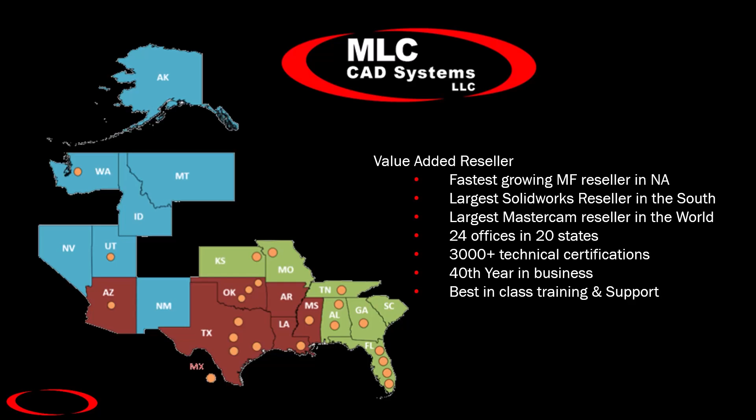I'm going to talk today about the basic 3D printing landscape, tell you quick information about Markforged, what it looks like when you pick up a Markforged printer. We'll talk about some examples and an overview of the solution, and then feel free to reach out for discussion or Q&A at any time, or reach us in the comments of this YouTube video.

So I want to tell a story real quick about an adoption of a new technology. Now, this is one that happened many years ago. This was the decline of steam engines and the increase in the use of electric motors in factories. And if you can see on the left here, this first graph talks about when electric motor usage or sales sort of overtook steam engines and became the dominant force in the manufacturing power industry. That's around the year 1920.

And as you can see, there was no going back, right? This was clearly the superior way to do it, and things looked great from that day forward. However, if you look at the graph on the right, productivity in manufacturing, you can see that productivity was kind of slowly going along, probably just a remnant of all general labor productivity increases, but the ROI dropped.

Because the early adopters had to pay for the tooling for all the motors, the buildup of the machine, the R&D to get the motors fabricated and make them more efficient and more powerful, because all of that was happening, the ROI really ended up being not that great. There was so much additional infrastructure investment required to get the electricity, to buy equipment that would run on electric motors instead of steam. And so for about 2 decades, it was kind of a losing battle, but it was definitely worth it in the long run.

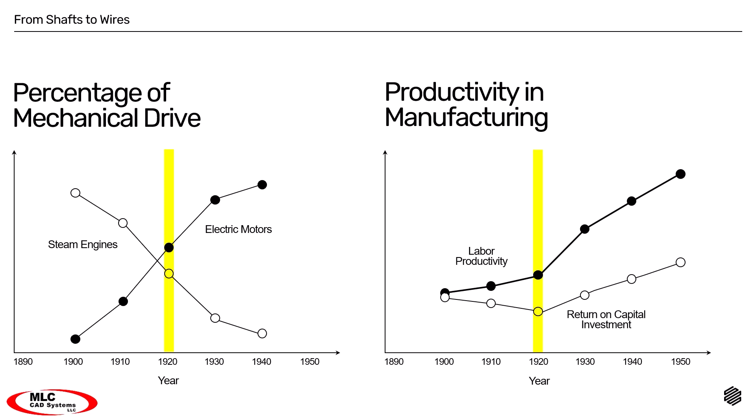But after that inflection point, the ROI started to become fantastic. And very soon it surpassed the productivity or the ROI that we've ever seen before. So it was definitely the right move, but there are some growing pains related to the time frame. So to overcome the constraints of steam power, factory owners had to shift their thinking. And that's what we're talking about today, is shifting your thinking to see how additive manufacturing and 3D printing can help you add value. Now, I'm not suggesting you're going to drop a technology entirely in order to adopt 3D printing, but it's going to be a fantastic add-on that's really going to help you out.

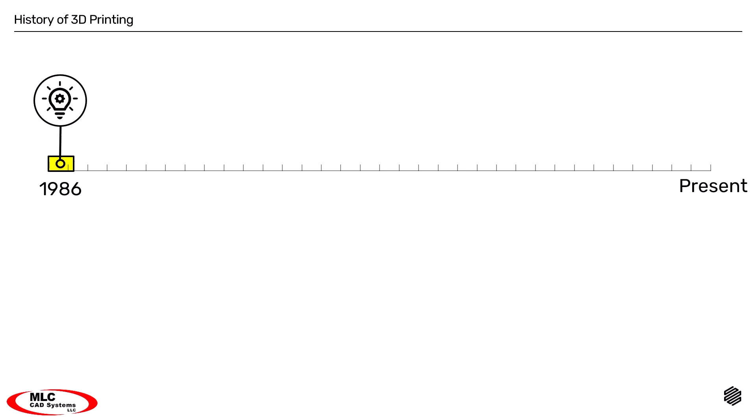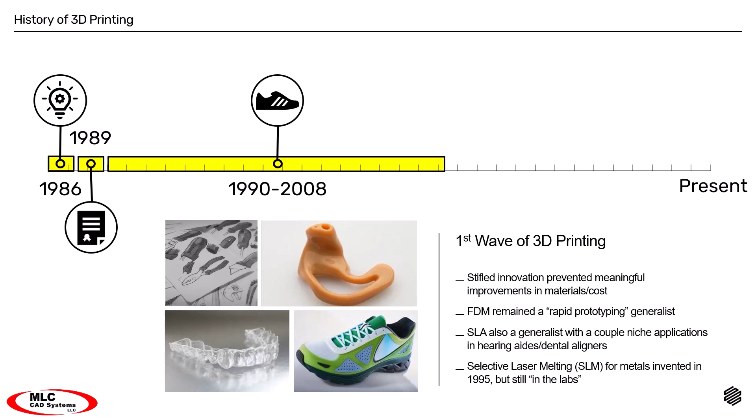So in comparison to the steam engine decline, let's talk about the adoption of 3D printing. It started back in the 80s. The original 3D printing was made. They started creating patents for all the various different technologies. And from the 90s to about 2008, you saw all kinds of really cool stuff. But it was really expensive, and most parts were not strong at all. It wasn't really until 2009 when the patents started to expire and companies said, hey, I can make something that does that. And there was an explosion in companies not only creating 3D printers, but people using them.

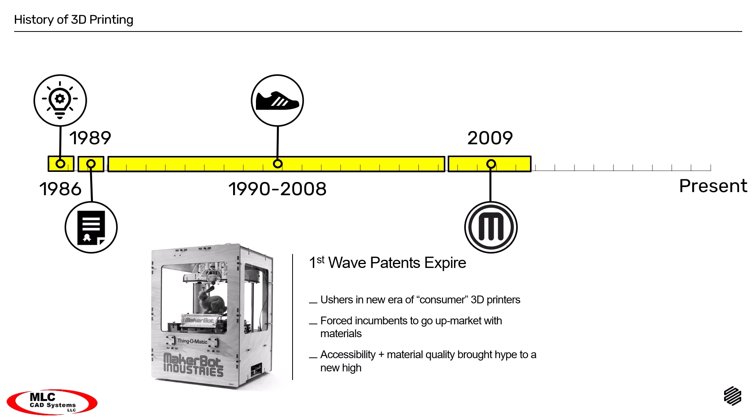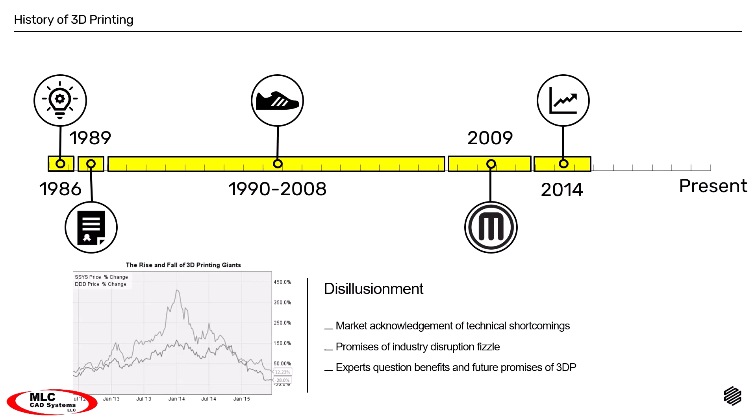And what we start to see is in about 2014, they were everywhere, but anyone who tried to use them generally felt them to be overpriced, not easy enough to work with, or the parts just weren't strong enough. And so there was kind of this disillusionment, and it was picked up on by Markforged. That's when they started out. They saw an opportunity in the market to create printers that could drive immediate value, that are extremely strong. In fact, their first customer was NASA.

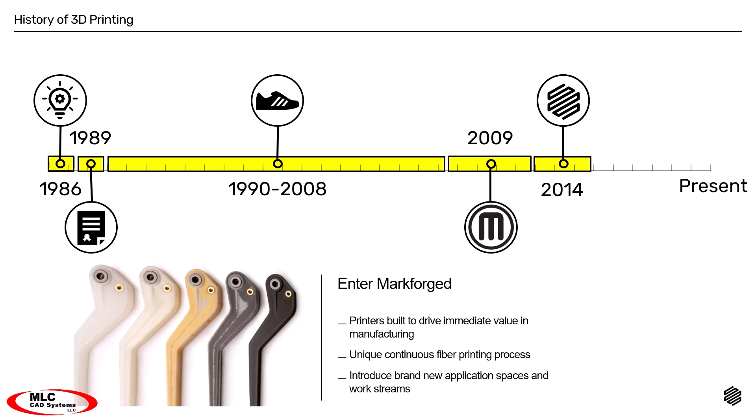They wanted to send the most stiff, strong, and lightweight parts imaginable into outer space, and they built the machine that would do exactly that. And what we've started to see since then is not just Markforged, but the entire industry has evolved and matured.

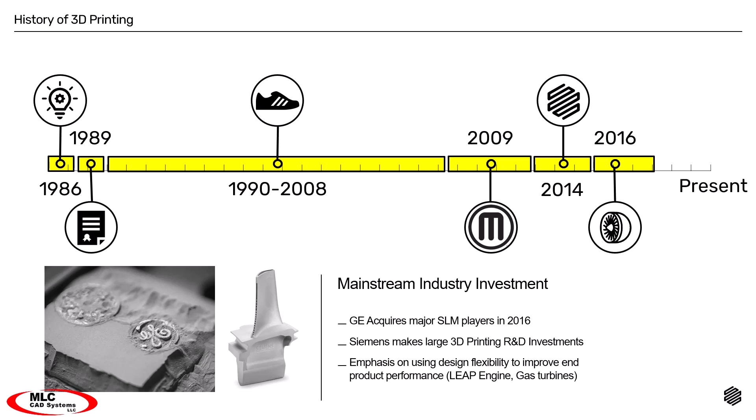And what you see now is we're seeing parts. In fact, today, the Boeing Dreamliner has 3D printed fuel injectors in the engines and the turbines. You're going to see more additive parts than you ever thought imaginable, and it's accelerating constantly.

So where we are today, we've got several different companies with a proven track record of creating really valuable parts and a really valuable system to add in to your existing manufacturing processes. And that's where we are today. So if you've looked at 3D printing anytime outside the last 5 years or so, it's time to look again and take a serious look at Markforged.

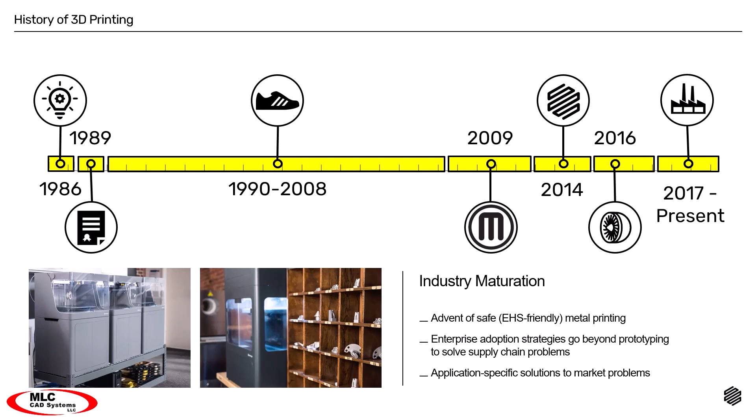It was established in Boston by some MIT graduates. They basically invented continuous carbon fiber 3D printing. A lot of people have tried to adopt or to copy some of the technologies, but we'll see a little bit later that there really isn't a corollary in the industry. These parts are really strong, really inexpensive printers relative to their counterparts in the industry, and they've created the world's largest fleet of online industrial printers.

It's on a cloud, so everything is connected. Your data is secure, right? Just like your Gmail account is secure, no one else with a Gmail account can see it. But because everybody's working on the same platform, they can watch usage, they can get feedback from users on what worked well and what didn't, and they're able to rapidly innovate with the benefit of seeing real-time information from all of the users. So the 3D printing ecosystem is smart, robust, simple, and empowering.

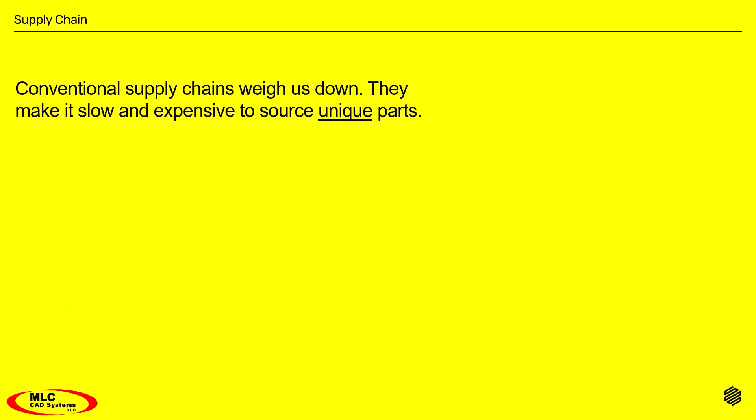So let's talk about why you would want something that could do all that. And it's supply chain. Supply chains are expensive. They're slow. They are many, many steps of paperwork, but they remain and will always probably remain the best way to create high volume parts for full production at a low cost and highly reliable.

But unique parts really struggle here. So whether you're talking about prototypes, tooling inside your shop, guards and guides and jigs and fixtures, or it could be even repair parts. Those kinds of things are really, really tough to source. And so if you don't have that manufacturing capability in-house, or you have to do a big changeover to do it for things like low volume production, it really isn't going to be the best ROI, or it's going to be difficult to make it profitable for you.

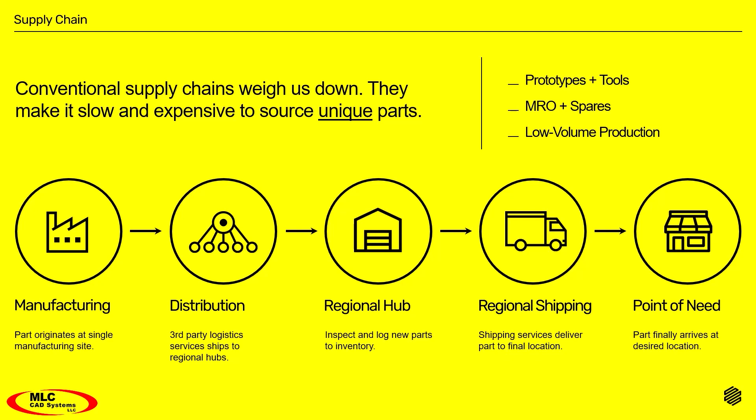And that's where Markforged comes in. We want to help you solve those unique part problems by bypassing the traditional supply chain, which, as we all know, is very problematic these days. And we want to give you an immediate payoff on your investment in a printer. But that's not all. We also want to build a culture of creative problem solving within your organization.

Let's look at some examples of what I'm talking about, who's using it, and what kind of success they've been able to have. So we'll start with the U.S. military. Wars have been won or lost primarily because of logistics. And with COVID and with just supply chain issues we're having right now, logistics is hard enough when you don't have people with guns trying to shoot you while you drive in and out of the work office that day.

So getting a part into theater could take months. We're putting these on expensive military planes and airlifting them if needed. The supply chain is slow or non-existent for maintenance and repair operations, especially in theater. So what Markforged printers give them the capability to do is to provide highly critical parts at the point of need. So you could have a designer on site, or a designer off site, basically creating the designs and validating them, and then that information gets fed into the machine and they print it right there and it's ready to roll.

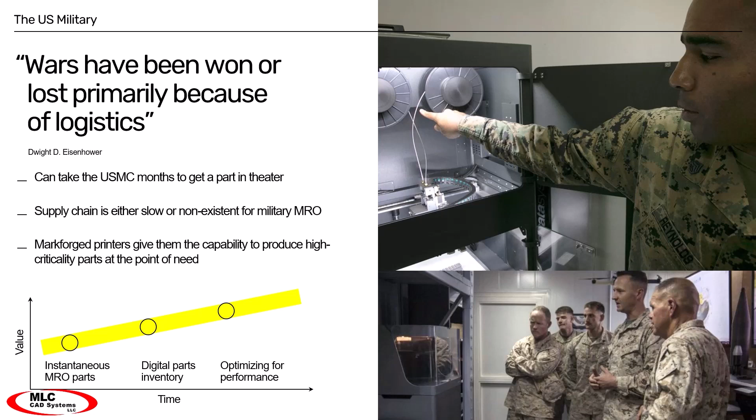And they have a whole library of existing verified parts that they no longer have to keep inventory of. As long as they have their printer, they can just say, oh, this broke, give me a few hours or give me a day or two, I will make another one. So really fantastic illustration of the extreme supply chain issues you might encounter.

MRO solutions, maintenance and repair operations, we're seeing a lot with this. And what you really benefit from is the ability to create something that's durable and strong, and you can iterate really, really quickly to get it up and running. And then once you get your prototype, it's a durable end-use tool.

So this innovation center in Orlando, for Siemens, they make huge steam turbine generators. They were responsible for supporting these turbines, but when maintenance was required, whether it was routine service or repair, there was downtime where they had to literally lift this turbine out of the building, disconnect it from the system, take it down there to get it fixed because it required specialized equipment they couldn't travel with, and then bring it back. And we're talking $250,000 for the lifting equipment and the trucking alone, not to mention the downtime for these critical pieces of equipment.

So what they did is they started building these tools. These are saws that go through and grind or reface some of the turbines, and they're built very specifically with lots of guides and gauges so that it can work on site in place, and they can basically take it down for a day, hours, I don't know, run the maintenance and get it right back up and running again.

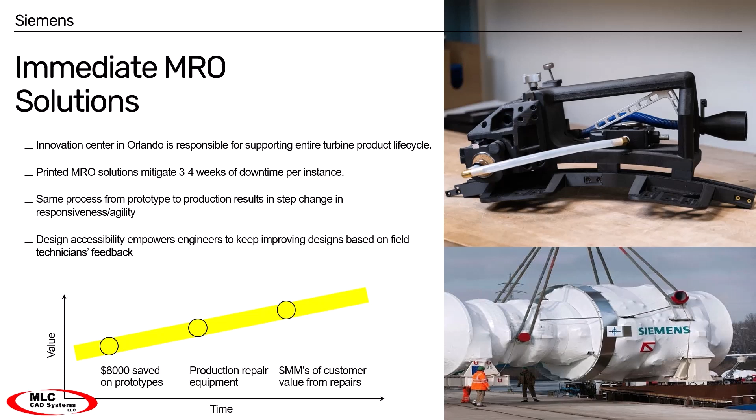So the ROI on these was absolutely stupid. They saved $8,000 for every prototype they did. They were able to perform and iterate tremendously faster. They could make as many of these as they need on demand, and absolutely saved a ton of money for them and their customers. Another company that, this isn't maintenance, but another company that's using it in-house is Wartsila.

So they have these huge steel castings, very heavy, and what they needed was a tool to be able to lift these engine parts. By the way, these are like drive shafts for massive ships, right? Cruise ships, etc. And so if you think about lifting up a massive casting, what you need to do is first put a hook on it. And to put a hook on it, you need some kind of device mechanism that sort of grabs the part and has a lift eye at the top.

Well, those are made of metal. And because of the size and the weight rating, they were very heavily built, which means they're so heavy that even the lift mechanism cannot be lifted without a crane, at least not safely. And so what they would have to do is go bring the crane over to where the lifting mechanism was stored on the shelf, pick it up and carry it to the casting, wait for the operator to hook it on, then they would carry it over to where they needed it to be for the next operation. They would drop it in place, they would disconnect, and then have to take back the fixture to the shelf.

So what they ended up finding was, A, this thing was cheaper than even the commercially off-the-shelf available steel versions. They also improved worker safety because at no point were they trying to handle or manipulate something that was dangerously heavy for somebody to lift. They also found that it saved time on their crane operators.

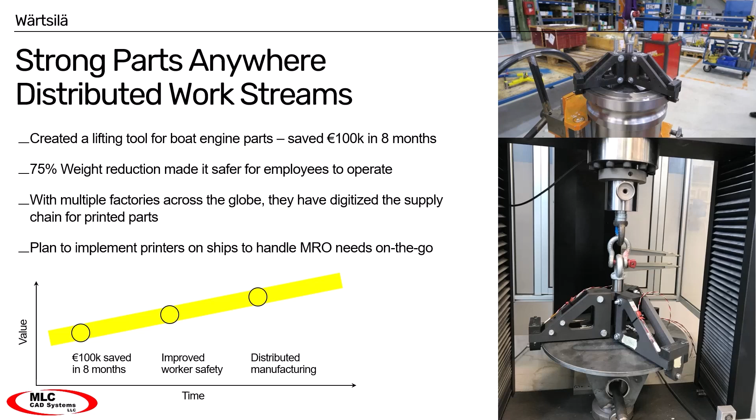And you're not sort of breaking the rules. You're not taking a chance. These are safe and effective parts. So the digital forge is what drives all this. And there's three main pillars. It's enterprise level software, industrial 3D printers, and industrial materials.

Now, you may think, oh, well, they're selling their own materials. They're just trying to make all their money there. These are not overpriced materials, but they are extraordinarily high quality materials. And because they are constantly innovating both in terms of how the printers print, the speed of the print, occasionally they reformulate some of their materials. And when they do, the software, the printers, and the material availability happens simultaneously. There's no downtime. There's no question of, do I have it right?

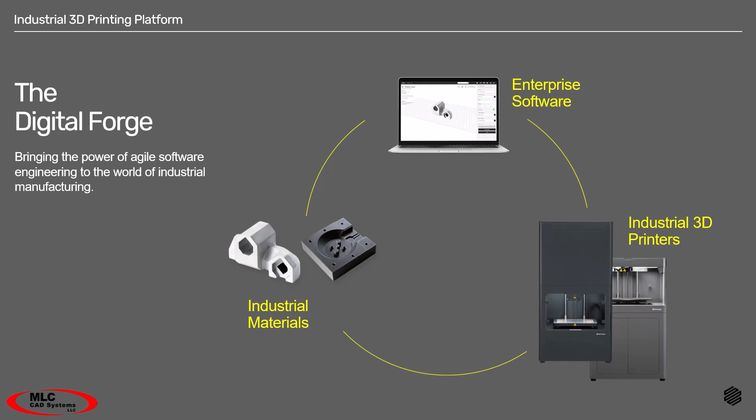You've got apples to apples, and you've got direct line of communication between all three of these, which means if anything goes wrong, you have a single source of accountability where we will be able to help you get back up and running and fix the problem. The hardware is kind of the star of the show for most people, but it's only one piece of the puzzle. We've got different grades, different levels of machines.

If you need more capacity, if you don't want to have to maintain a bunch of small ones, if you're looking for something with more automation, with more sensors, so you know it's going to run well and it can run even more lights out than the desktop, then you can go up to the X7 or the Industrial series. They have bigger beds. They have stronger drive motors, so they're going to be able to print much, much faster. And they do a lot of the same materials. So it's sort of like just the bigger version, right?

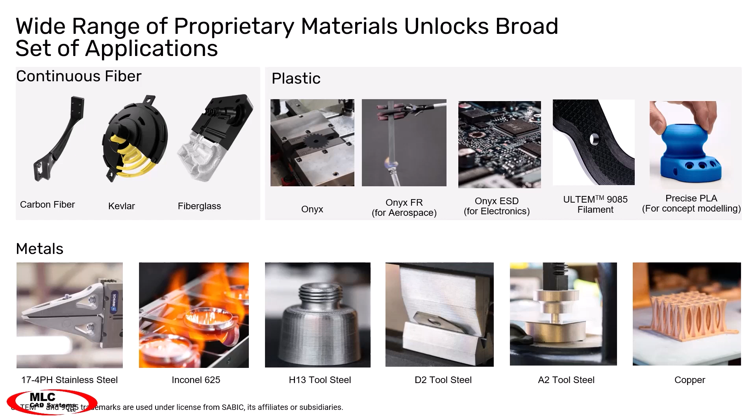Then we have 3 tool steels, H13, D2, and A2, depending on what you need, whether it needs to hold an edge or it needs surface abrasion resistance. There's some variations in what those do. And then pure copper, which is fantastic for thermal and electrical applications. So for example, EDM sink patterns or heat sinks, things like that.

So the PLA, the Onyx, the carbon fiber, what it allows you to do is start quick and cheap. PLA is quick and cheap, and you can print it and basically hold it up and say, does it fit? Do the bolts line up, right? Once you get the shape down and you immediately have something that's at least semi-functional, then you can start iterating and say, okay, well, if I did it like this, I could lose weight. If I do it like this, it's easier to assemble and it's quicker to print.

And then once you feel pretty confident that you've got that part done, you can step up to Onyx. And that's where you can start to actually put it into production. You can load test it and see if it's strong enough. If it's not, you can add some fiberglass, some carbon fiber. You can increase the density of the interior of the part. With one design, you have full control over the strength and stiffness of that part.

And you can actually go into initial production with this, meaning you can delay your tooling purchase until the market has had a chance to look at it and decide, yes, this is something they want, or maybe this isn't quite what we need to do a design change. Thank goodness we didn't buy tooling yet.

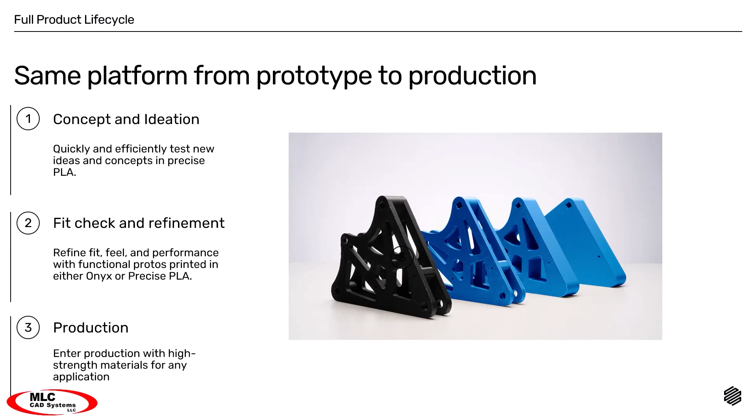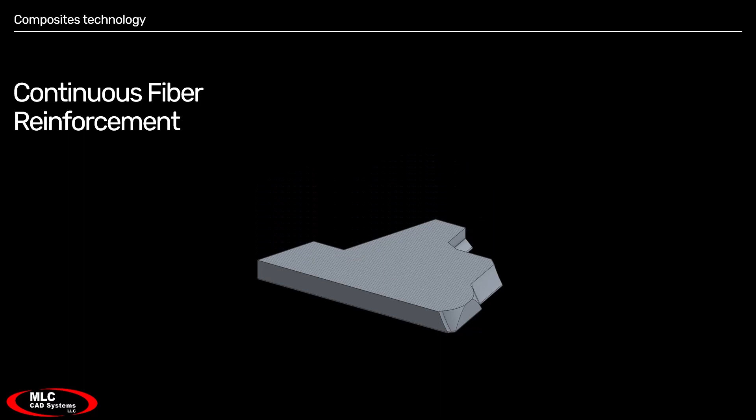So the process, if you're not familiar, of continuous fiber reinforcement, it starts with a 3D model. We can handle any CAD package you may have, and you start slicing it layer by layer. So for each sliced layer, we will go in and trace out the walls, trace out the floors, and those will all be solid, but then we'll put sparse fill on the interior, and then you get to choose where to put the continuous fiber reinforcement.

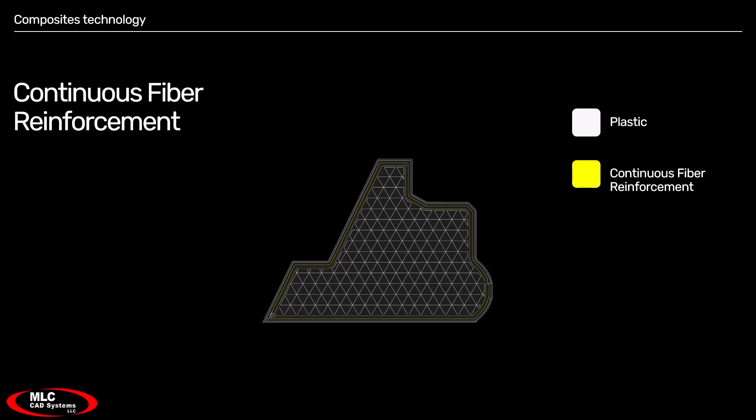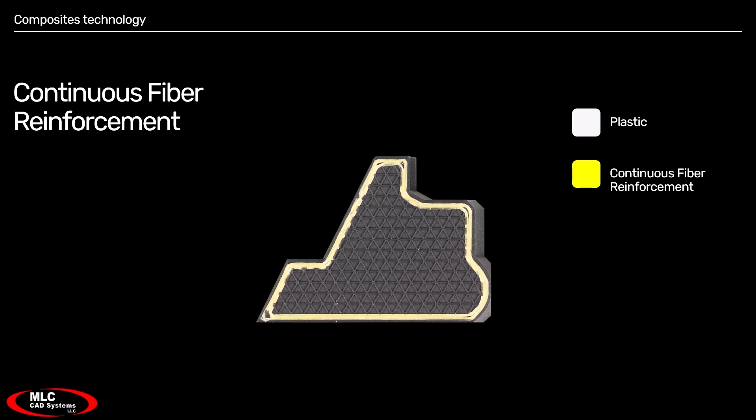You can cover the whole plane throughout, which would be great for like a sandwich panel, or you can put it around the edges like this one that's really going to give the part a fantastic strength to weight ratio. This is what it looks like when it prints. That's one continuous piece of, in this case, Kevlar that's traced around and around and around. So there is no sort of failure point unless you literally break the material.

They're going to take these plastic parts like bones inside flesh, and they're going to give them tremendous strength capabilities and stiffness capabilities. And we're seeing people replace metal parts all over the place. You'd be amazed at what is possible, and we can talk about what you might need to look at to see if this is a good use for you.

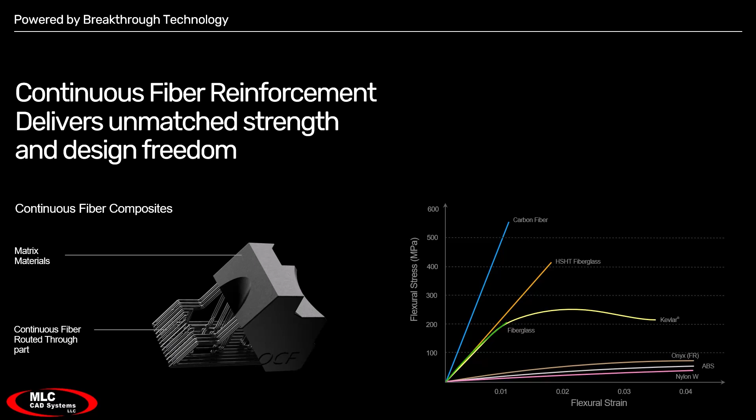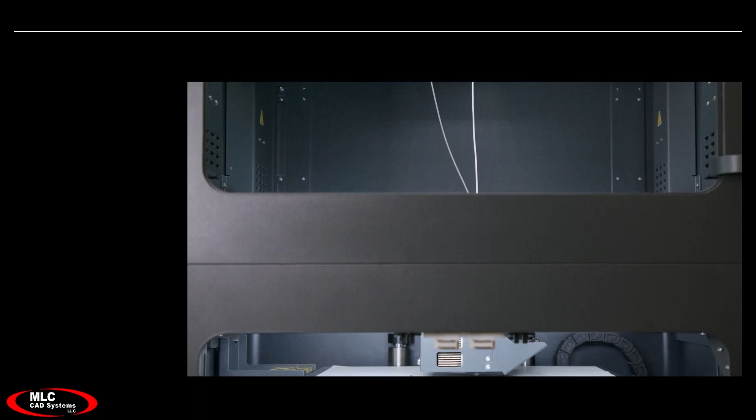Metal 3D printing is another area that they expanded into. What they did is they took their experience and knowledge from extruding plastic filament, and they created basically a bound metal powder. That bound metal powder is deposited the same way a polymer 3D printer would work. It's built up layer by layer with a ceramic release.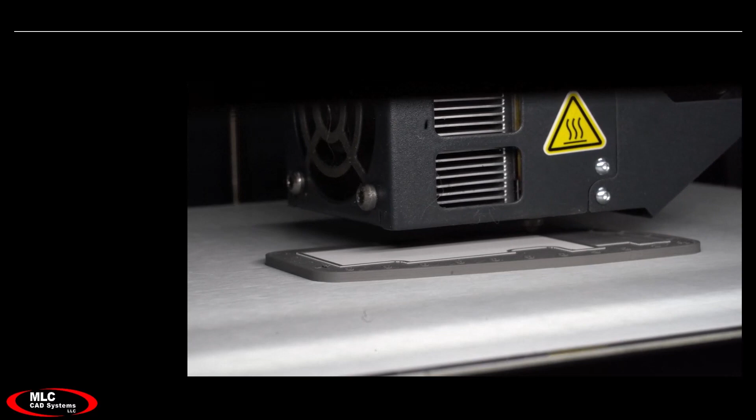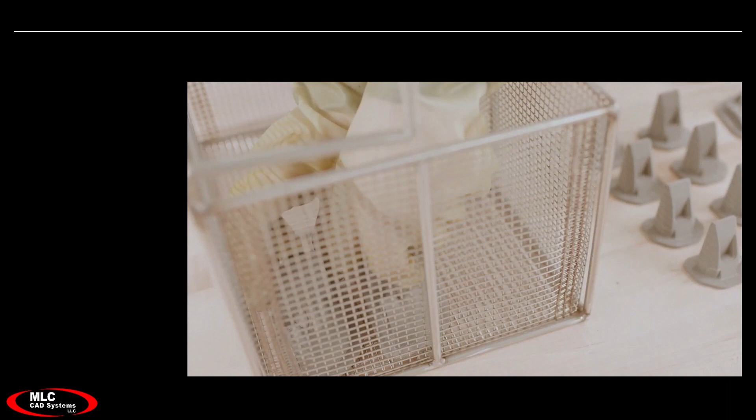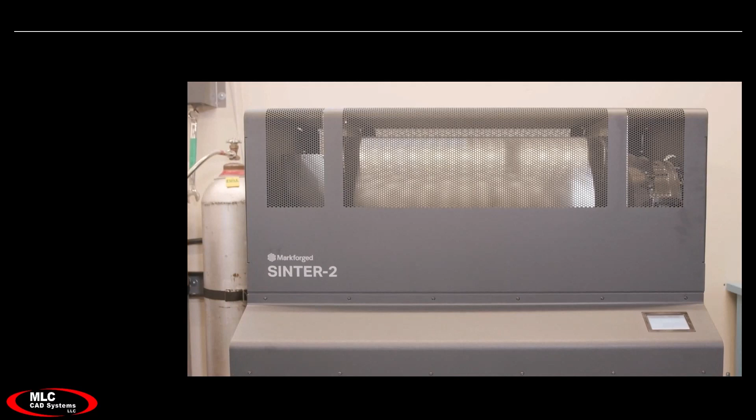So if you need to build a part and you need to have it sort of separate between two faces, you need to have something in the middle that can break away. The wash process, that's where they debind and kind of remove the binding agent. The debinding agent then needs to be removed, so those parts are dried in another compartment in the wash station, and then they're ready to be sintered. So you collect them up, put them on a build plate, and load them up.

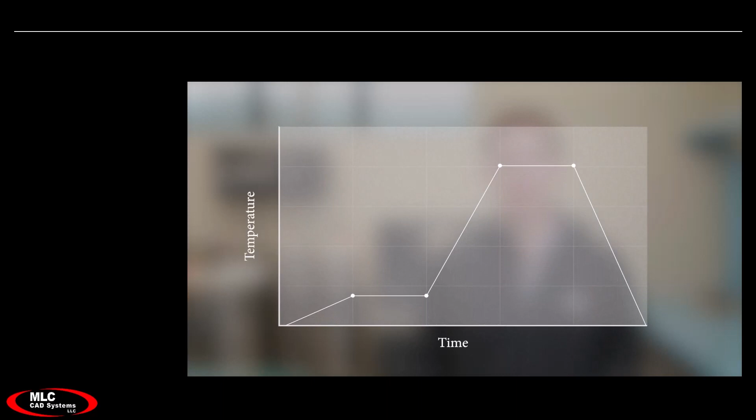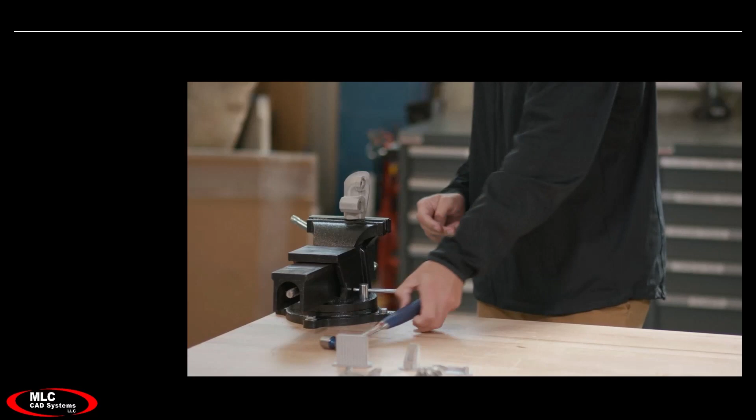This same type of sintering process is used in high accuracy parts like gears. It starts out by kind of removing the last of the binding agents that are in there, and then once those have dissolved, it ramps up the heat, solidifies all the metal powder into solid metal, and this is something that gives you an extraordinarily strong, durable, and very dense part.

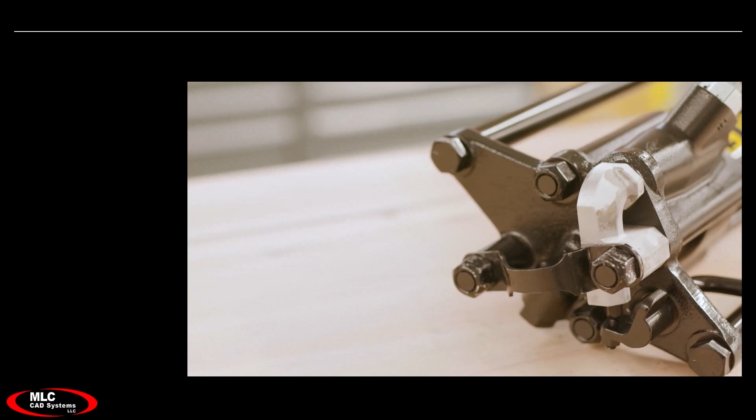You're going to be able to create metal parts in one piece that normally would have either taken extremely intricate machining and costly fabrication, or would require an assembly of multiple parts. That wouldn't be as strong as a single solid part would be. How strong? Well, it's metal. So a lot of times people ask us questions about our materials, and when they ask about our metals, it's really easy. Go look it up on Google, and what they say there is what we've got too.

So depending on how you process the metal, that will make some differences. So for example, casting or metal injection molding is not going to be as strong as a Markforged 3D printed part. We have a really, really fantastic density of our solid parts. About the only thing you can do to get better than a Markforged part in that metal is to have a forging built in that metal.

And forging is definitely an option for the highest possible strength and toughness, but this is a really awesome high-speed version of creating that part. And again, you can make it in almost impossible shapes because of the 3D printing additive aspect.

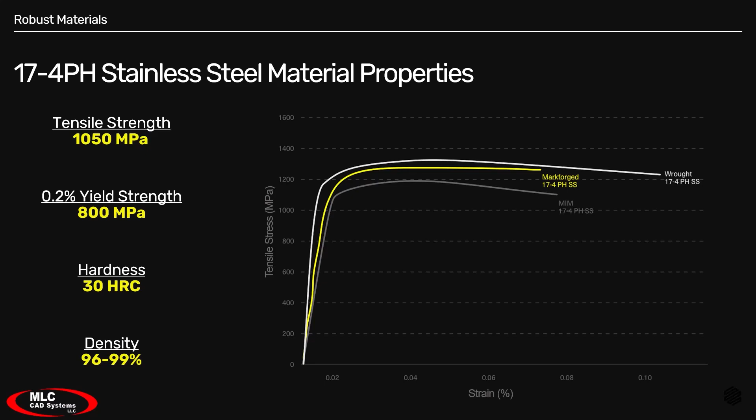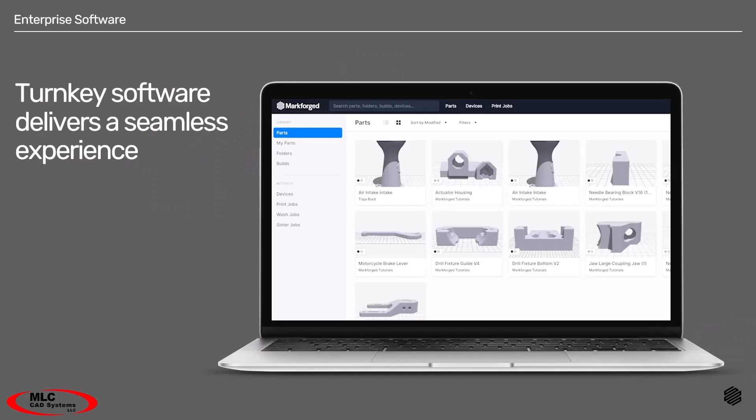So next we'll talk about software. The software is called Eiger. So if you ever hear Eiger, that's what we're talking about. And it really brings a modern ecosystem to this modern equipment. It's smart, connected, accessible, and scalable. So what does that mean? The software itself runs on the cloud. If you need an offline version, they have it, so you can keep it ultra safe and stay disconnected from the internet.

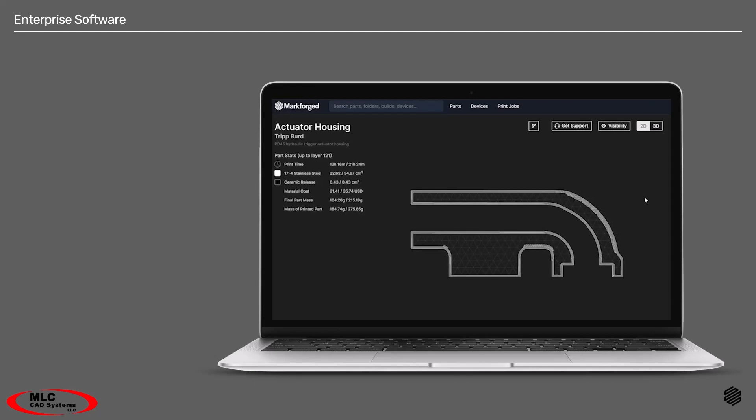But basically, you just import your part, put it where you want it, and it'll immediately tell you how much it's going to cost. It's going to show you the interior details, so you can decide, do I want my walls to be thicker or anything like that. This one is a metal part, so there's no continuous fiber reinforcement inside of it, but we will be able to see exactly what's going on. Then we can print it in our printer, either one off, or we can fill the bed up and create several at a time to do it in a batch. And it will run unattended.

Because it's cloud-based, you can use any browser to get on it. So, for example, your cell phone. I'm constantly checking the progress or acting on anything that needs to be done from my cell phone if I get an email. And a lot of times I'll be sitting at dinner with colleagues and they'll say, oh, awesome, my part's done. And then they'll know that when they get back to the office, it's going to be ready to roll and they can start planning their day.

The tools are also connected back to the Markforged servers. They're extraordinarily secure, like military-grade security, but the usage and the feedback that you provide goes into an artificial intelligence algorithm, and it's constantly making the parts better. So as we go through and start building things, or if you are to do things like scan and feed back into the system the results, you don't have to tweak your process. The AI will tweak the print.

So in other words, if you build a particular shape and you find that every time you do it, it's 10 thousandths bulged or 10 thousandths warped in a certain direction, we could scan that, put it back in, and then it would offset that. Meaning you wouldn't have to go and modify your model or cheat your model to get it to print correctly. The software will take care of that for you. It's pretty amazing. Speaking of scanning, we have Blacksmith.

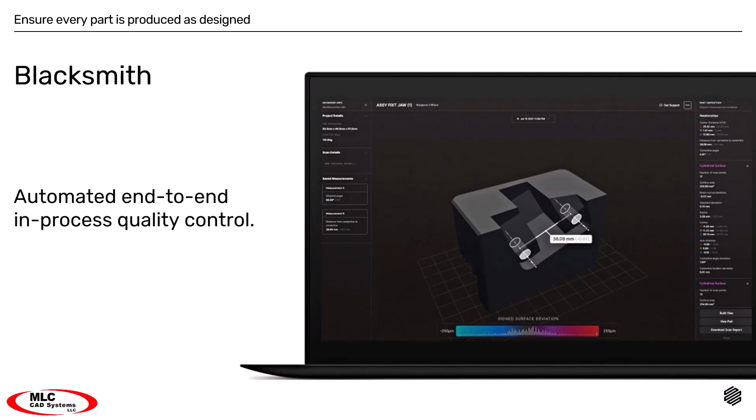And probably one of the most impressive things about it is when the print is done, it'll tell you not only, hey, the print is done, pick it up and take it, it's also going to email you the quality report telling you with confidence that that part was printed exactly as you'd expect, and it'll show you all of the deviations from what you expected, and you can make an assessment right away about whether that part is ready to go, and you can use it immediately.

If you start to scale up, as you start to get more printers, or you have printers in different office locations. By the way, that's a fantastic way to share your production. You literally put it on Eiger, make sure it's working, and then you say, hey guys, if you ever need this part, no matter where you are in the country or in the world, just grab it out of Eiger and hit print, and that print is going to be perfect because it maintains all the settings that I used.

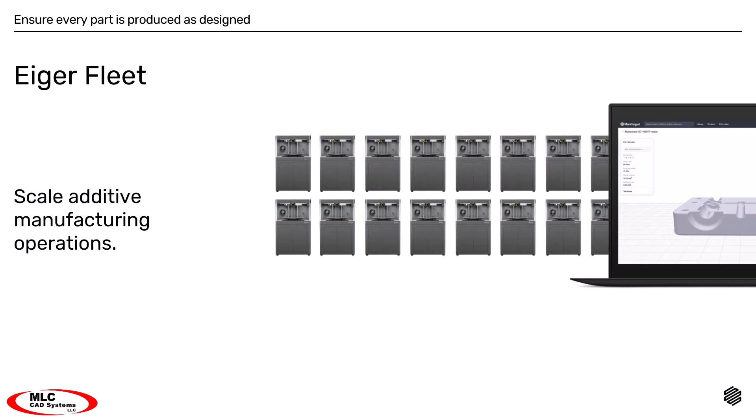But Eiger Fleet allows you to say, look, I need 1,000 of these. Spread them all around on these printers, and it'll just go ahead and take care of it and tell you when those 1,000 parts are done collectively from your entire fleet.

So the scale advantage really helps to fuel Markforged. As we get more customers, we get better at making printers. We get better at getting feedback with customers with part data, especially things like Blacksmith. And that feeds back into the algorithm to make the prints and the printers smarter. The feedback that we get to say, well, this was a problem, this one didn't work well, we can put that into consistent improvement, which gives us better parts, which gives us basically more customers.

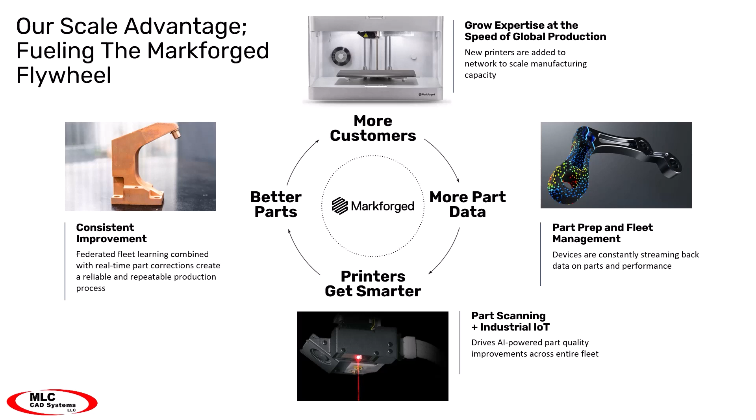And we've seen this over the years. Each generation of printer that comes out is significantly better than the previous one, and they continue to release new machines and new printers to address different capabilities. But they start all the way down at the desktop level, a very affordable 3D printer, and go all the way up to those industrial grade, basically production level machines.

If you need to learn more, if this is your first foray into 3D printing, or you've never used a Markforged printer, we have workshops at the Markforged headquarters that you can go and attend. We also have on-premise training. A lot of times if you buy a printer, we'll actually come and help you set it up if you choose to have us help you.

You can do it yourself, but if we come on site and put in the piping or anything that might be necessary for some of those industrial grade ones, we'll usually do training while we're there so that we can tell you not only how your machine is set up, but also how you would use the additive mindset to solve problems. And we also have Markforged University online.

Fantastic way to polish your skills, learn more, and really understand not only how to use the tools, but even how to identify applications. So if you're not sure if you are sold on the idea that you need a Markforged printer, but you're interested in finding out what you could use, you can go on there and learn about finding applications and then identifying them and performing an ROI to see if it's going to be a good fit for you.

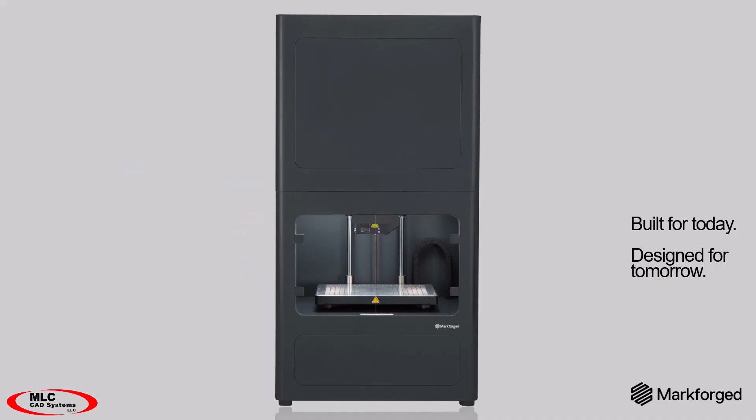So Markforged, with the digital forge platform, the printers, the software, and the materials, it's built for today. It's built to give you an ROI for today, but it's designed to be a long-term impact on the profitability of your company.